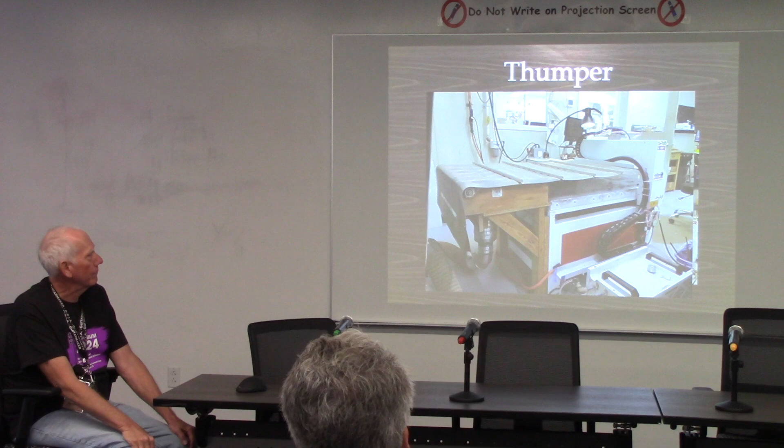So this is a machine that you can purchase. They're relatively inexpensive, and sometimes they actually work well. The Thumper is the name of the machine, and all our machines have names. But this one, we got an order when we first started business, and we had to fill it.

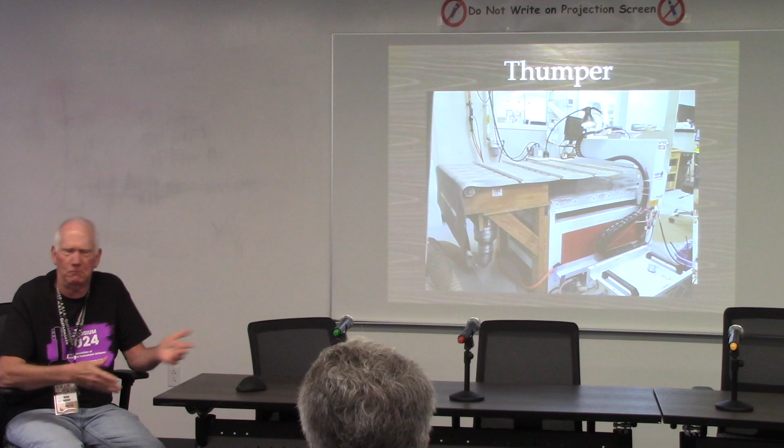But when I'd arrived, I called my friend Dan and said, Dan, I got it. He goes, well, cool, how is it? And I says, it's okay, it's working good. He says, good, I think I might get one now. I'm glad you tried it out for me.

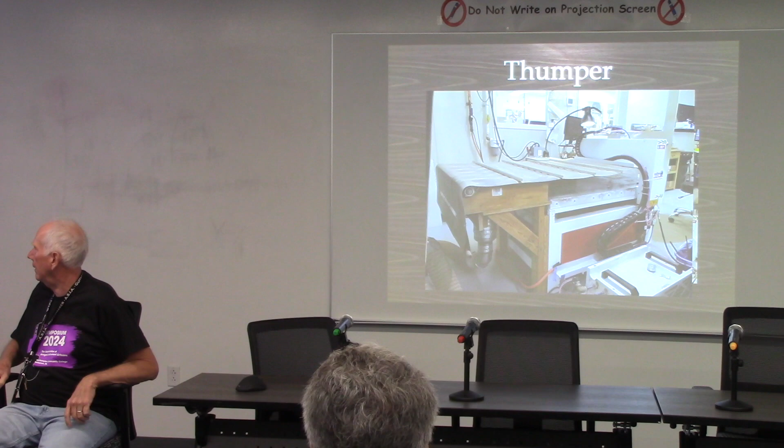But the topic of the dust, you can see that there's neoprene that's... oh geez, you know what I have? Do you have that folder? Yes. That's great. This will tell me what I'm talking about.

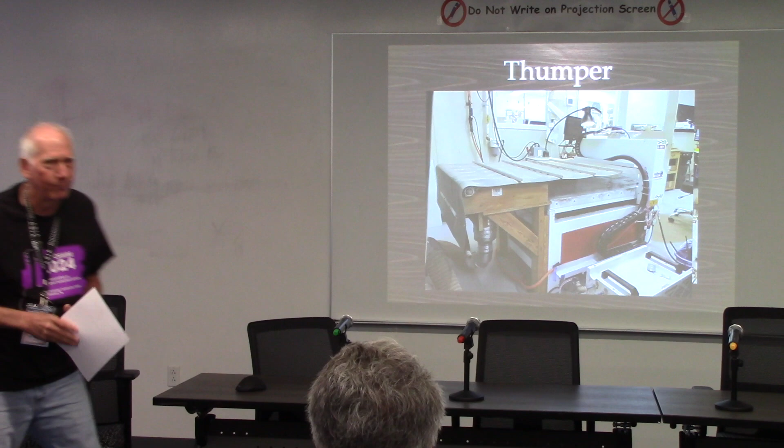So what does the machine actually do? Can you go to the next? There we go, now looking at the side of it. Oh I see, it's a moving gantry. Rather than talk about building machines, I was thinking most people here, if you're going to get into CNC, you're going to buy something, and this is what we did to modify this machine to try and contain the dust. So if there was not a cover on the back - you can see where the spindle is, there's some nozzles that we use air to blast the tool to keep the tool cool and dust away. That dust would be flying backwards or going everywhere and getting places you really don't want it to be. And health-wise, it's not so good to breathe dust, and nobody really wants to wear masks all day long.

So what I did was I took some plexiglass and bolted it on the side. I cut it in a way that would go underneath the gantry, and put it on both sides. And then I got this neoprene, which I have some specs on it if you have any interest in that.

But it flopped in the middle, and it wasn't working. I even put a weight on the back to try and cause it to be tight, but it still kind of bowed down in the middle.

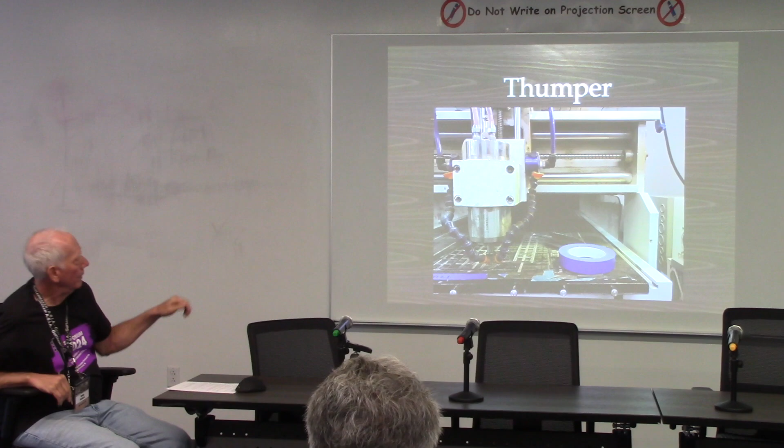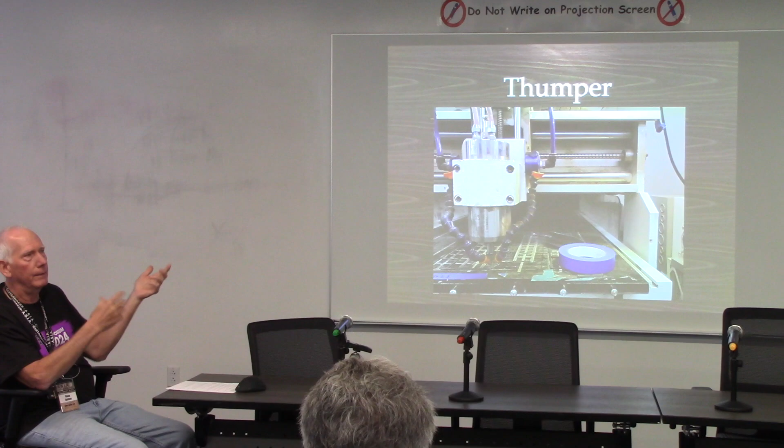So looking directly down into the chamber, that was the effect that I was looking for, was to try and contain this dust. And on the other side is the dust collector. So the idea was to create a negative pressure atmosphere that would want to draw things into the chamber.

And it's worked pretty well, and you can see it's pretty MacGyvered, using plywood and nails and screws, and I kind of built it in an afternoon because it needed to happen, and I did use whatever was available. The rollers and the bearings and things I got from Grainger, and just kind of MacGyvered it together, and it worked, so I didn't have to do any more.

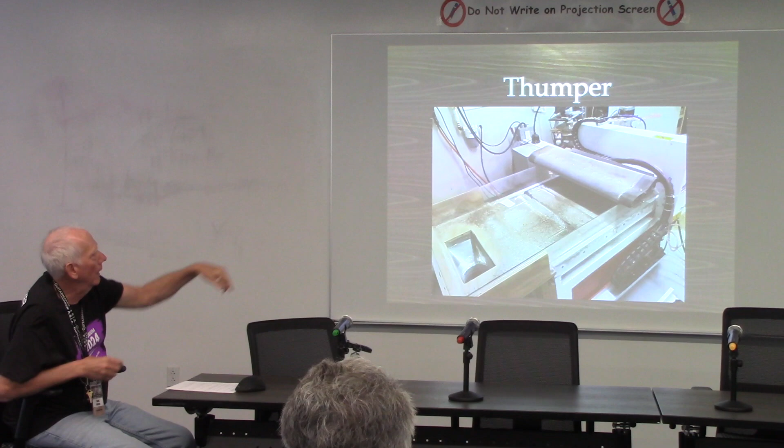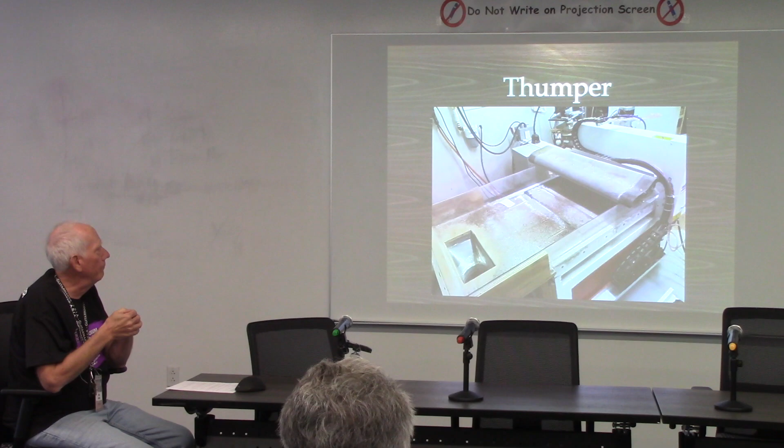And so you can see the screws on the underside, screws and washers that I did tap the holes into the U-channel, and just use an awl to push through the neoprene, and that's been working now for 12 years. This is the specs on the neoprene.

So what I found was I had used HVAC fittings. And I thought that was going to be perfect. It was going to work great. And it did, way better than what we had before, which was nothing.

And then what I found happening, that as we blew air into the dust chamber, it would kind of come back out, undesirable. And the dust was accumulating all around that opening. And I thought, why isn't it just falling in there? Because it's got the suction coming in. Why isn't it just falling in?

Well, it just wasn't. So on other machines, which we'll see later on, I came up with the hopper idea. And I looked everywhere. There's all kinds of hoppers, but there were none that I needed.

So I thought, well, let me just get some masonite that has that smooth surface on the outside, on one side. And I got in my CAD system and drew this thing up because I didn't know what the pieces would look like or the angles that were needed, and because I also had to fit it into certain areas.

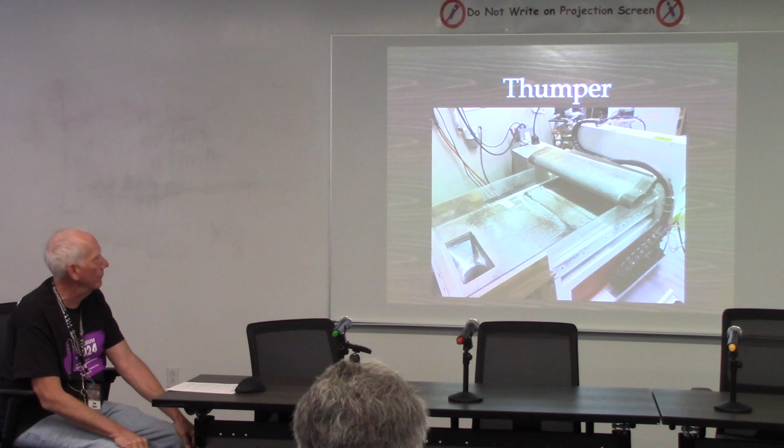Just one question. What size is that machine, the last one, so I can kind of get how big that pipe is? I'm trying to scale everything, but I don't know if it's a 4x8 or a 3x5 or whatever. How big is the table?

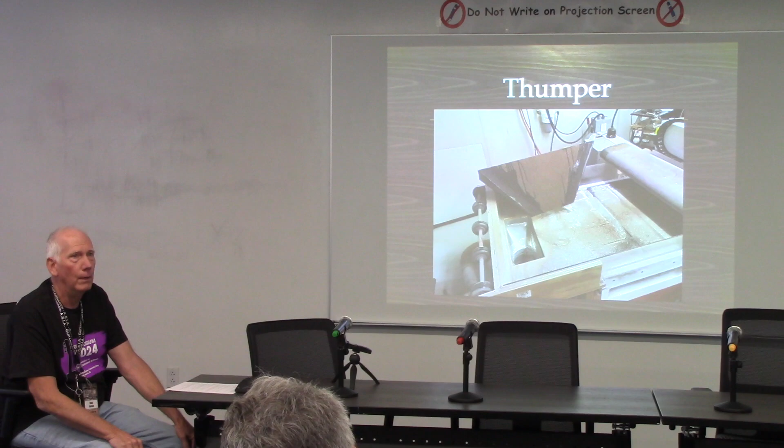How big is Thumper? Thumper is a 2x3, 2 foot by 3 foot. Okay, that pipe is not as gigantic as I thought. Thank you. Appreciate it.

T2 is the second Thumper. It didn't thump to begin with, but it's a similar design, and so instead of Thumper 2, we just call it T2. T2, when it came in, it was a different machine than T1. T1 was okay. T2 was a piece of crap.

It was terrible. So you can see the gray table underneath. I had to do away with the table that it came with because it couldn't cut a straight line. So I ended up getting a precision ground surface table, which this company in Chicago, they make machine bases, and I think it might have been $1,000.

But it's precision ground within 2 thousandths on the top, and I used that as the new base for the machine. I took the Thomson rails that were on the old machine, on the old base, transferred everything over. I had to change a little bit on the gantry to incorporate the table, but it ended up that after putting that new machine base on there, it's incredibly accurate. It's my coworkers, they enjoy using it.

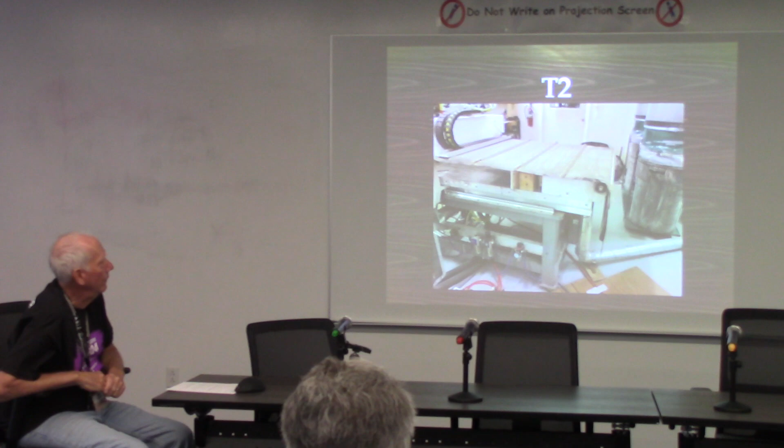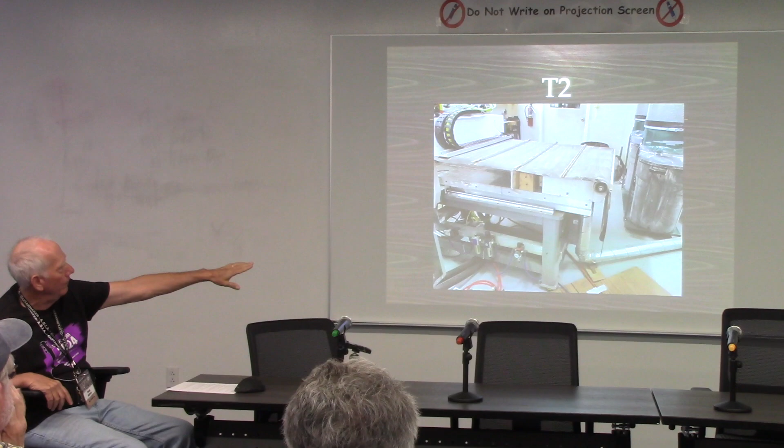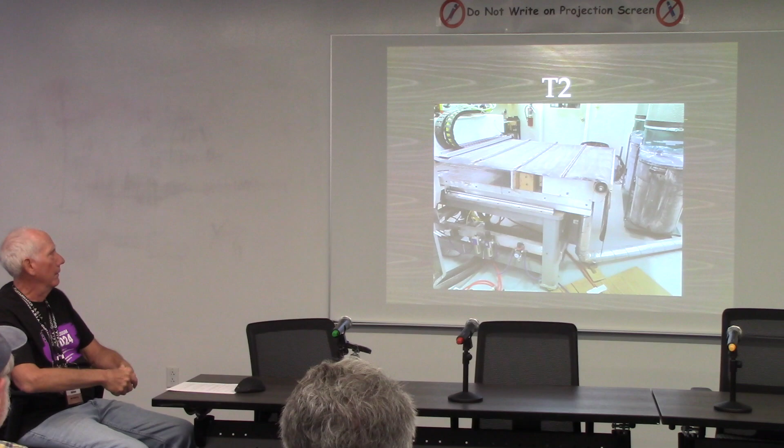I had some 2x4s and some... What are the bearings and pulleys for? Just so it rolls up and roll? Oh, it's got to be able to move when the machine moves. Yes, when the machine moves, and you can see at the bottom there. Basically I think on this one it's just a steel rod that I took the end and folded up, and it does what it's supposed to do.

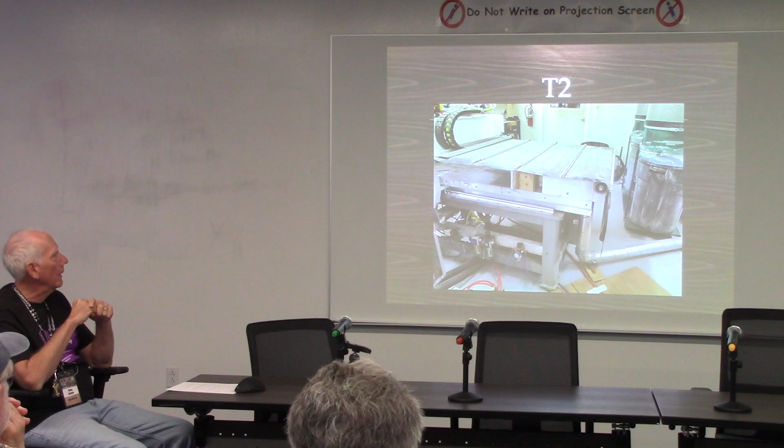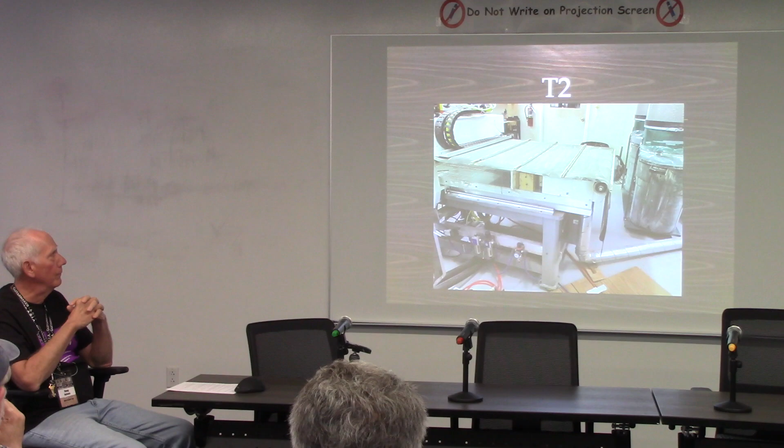The plexiglass I just cut on a table saw to the sizes I needed, then took a file on the edges to get any sharp edge off, because I didn't want the plexiglass to have a wearing problem. As long as the surface is smooth, the neoprene just keeps on going - I haven't replaced any of it at all. And you can see this is kind of like a modified hopper.

Do you have any dust collection right at the spindle? No, we just have the air nozzles. I thought about it, but since we change our tools quite frequently and also clean the collet very frequently, all I could think of was how much time that was going to take to move the collar, and it just wasn't something I wanted to do.

So why do you clean the collets a lot? Just so they don't get crap in them and wear out more quickly, or? Yes. These are ER11 or ER8 collets, and the dust gets in there - shell dust, wood dust. And the more dust that gets in, the more the tool runs out.

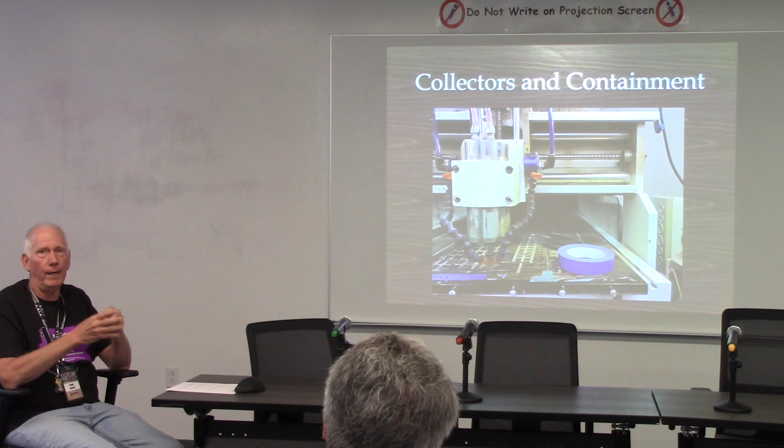So if you find that your tool is breaking a lot, you might think about cleaning the collet, because those little tools don't like that - they let you know there's runout. But pretty much every time we change a tool, we'll at least take the nut off and give it a gentle air blast to get any debris off. If we have to hold real tight tolerances, I'll do that whole WD-40 cleaning process. And believe it or not, when you measure the part, you see the difference.

How many operating hours are you running your collets and nuts before swapping them out? Do you track that? It's in years. Okay, it's in years.

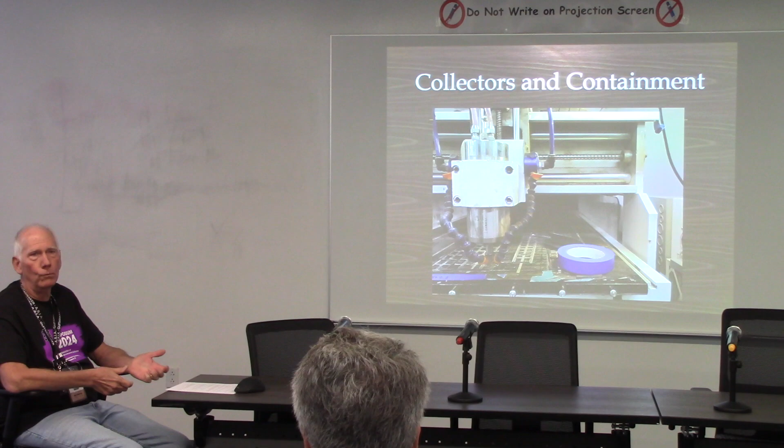The spindles we use are water cooled, and typically we bought them from Alibaba. I was buying 20 at a time because we have multiple head machines, thinking, well, it's Chinese, it's not going to last long, and it's water cooled so it's going to rust. In the first couple of years we had tanks of water, tubs, and little pumps like you'd use in pools or ponds. The water got really nasty, and it plugged up the spindles, so I just ran them till they cracked. The price of a spindle was only about $150, so I was thinking if it goes a year, great, it's a throwaway.

So things evolved, and we've gotten to a point now where we have laser chillers - this is one - and I've gotten antifreeze from West Marine that has rust inhibitors in it. These chillers are totally enclosed, no dust gets in, and using the antifreeze instead of water means it doesn't grow the contaminants that water likes to - there was stuff floating in there, it was nasty. The tank's still over in the next room, and I'm the guy who got stuck cleaning it.

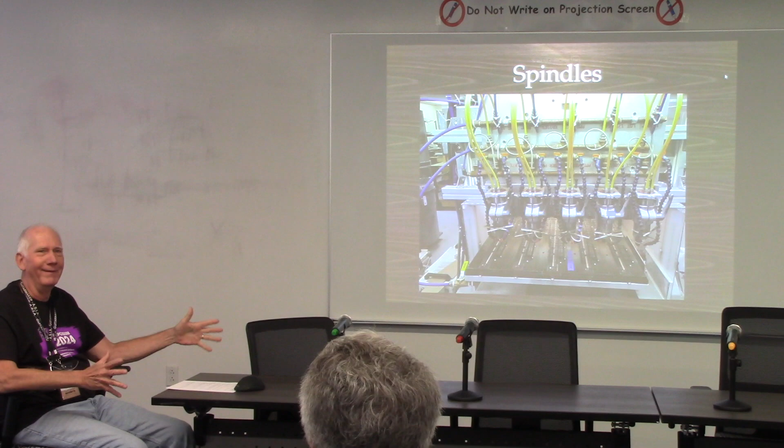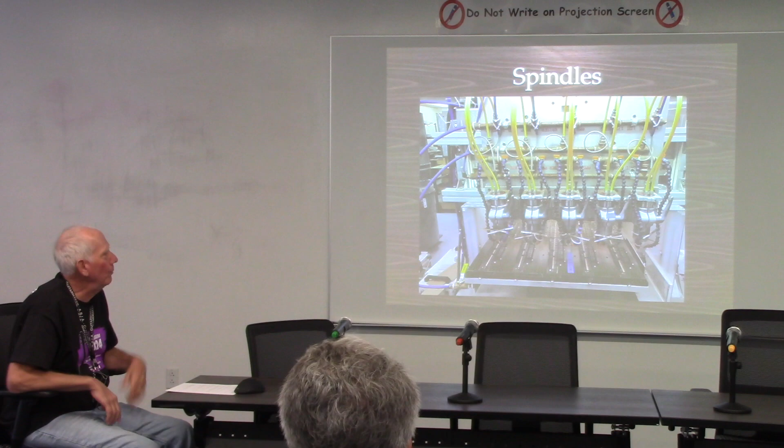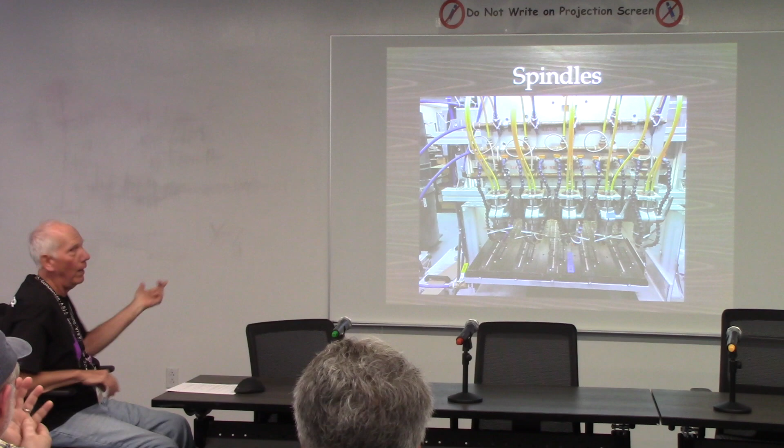But these are from China. What voltage are they? You can buy the spindles by themselves, or you can buy them as a set with an inverter. And so the spindles typically are three-phase, but the inverter is single phase, which is like your house voltage. So you can take 220, which would be a house voltage, like for your dryer or your stove, and it converts it to the voltage. And of course, in the inverter, there's lots of parameters that you have to mess with to get things right. But that's how it's set up.

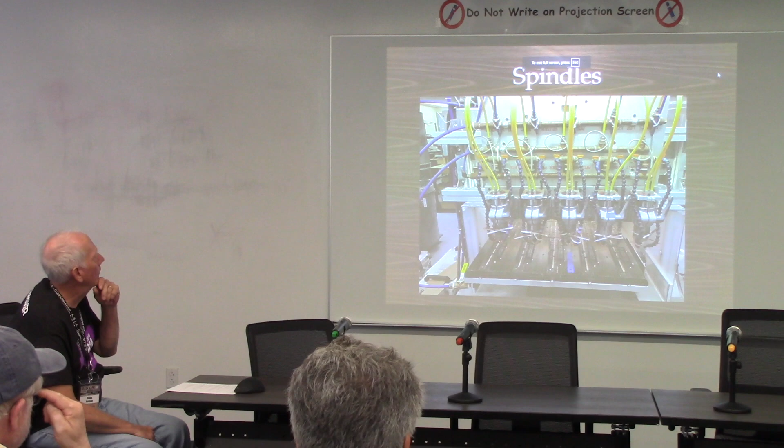But can you go back to the five-headed machine? Oh no, that's going forward. Here we go. What I did was the inverters are on the back side. I made a big box out of aluminum, and in there I put all the inverters, all the power supplies, all the fuses, all that stuff is in this box in the back.

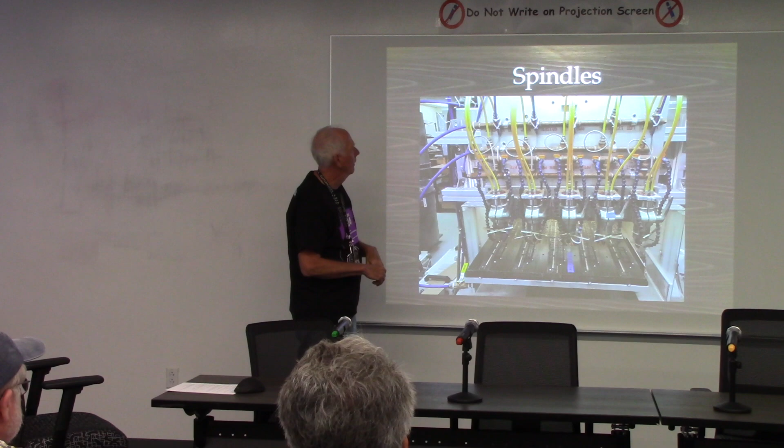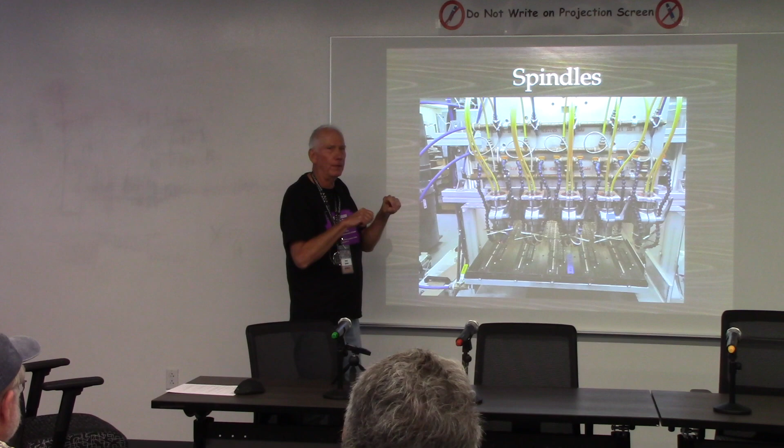I needed to have a wire thing to hold the wires, like a wire track. And I thought, well, I don't want to have all these bulky things. So what I found was tubing, like air tubing. That was the idea, it was big enough so that I could put the wire all the way through it. And I secured it on one end inside the box and just cut a hole in the metal and had it as I go up. So they're kind of looped around, and you can see I just kind of used wire ties. Again, this is all MacGyvering now.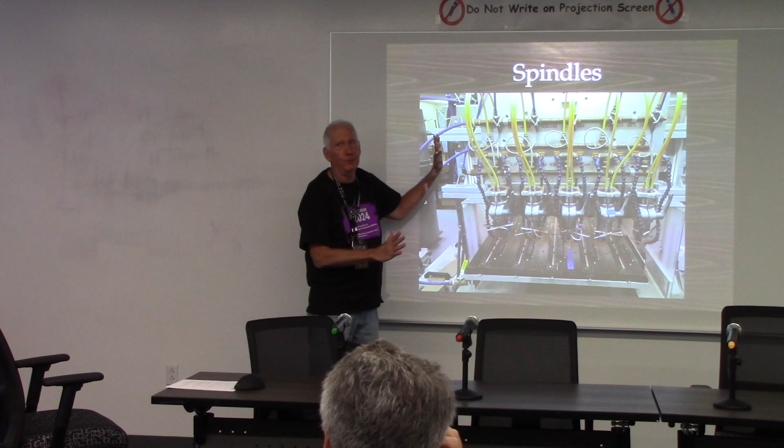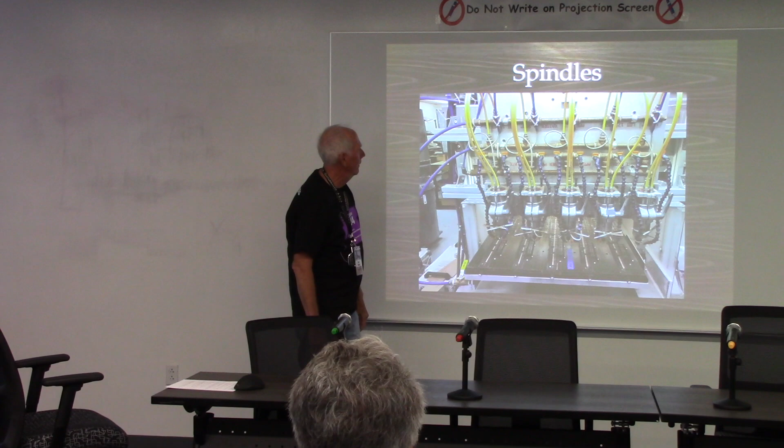And once it works, you don't have to touch it again. Or even make it better. So you can see coming out of that tube is the wire that then goes into the motor. I did that 12 years ago, and it's been working ever since, so I didn't have to do anything to it. Color coding, you can do your own. I happen to have yellow 8mm tubing that was required for this, so that's why it ended up being yellow.

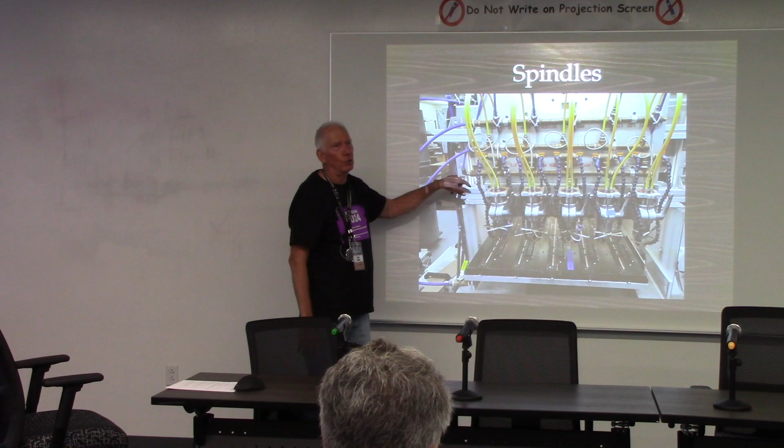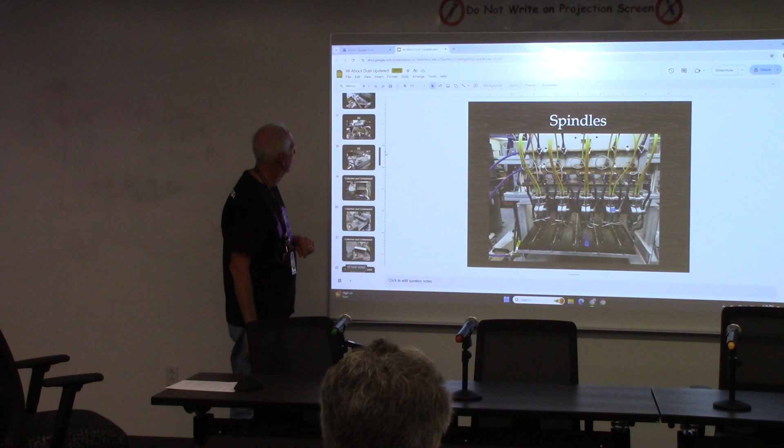This stuff doesn't last a long time. It's lasted 12 years, and it gets brittle and breaks, and the antifreeze shoots out all over the place. So currently we have clear 8mm tubing, and that's on the first one. I think Thumper had it. Yeah, Thumper's got it. So these are still functioning, so they're still yellow. But yeah, Thumper's got it right there. So you can kind of see that it's clear, and you can see the antifreeze.

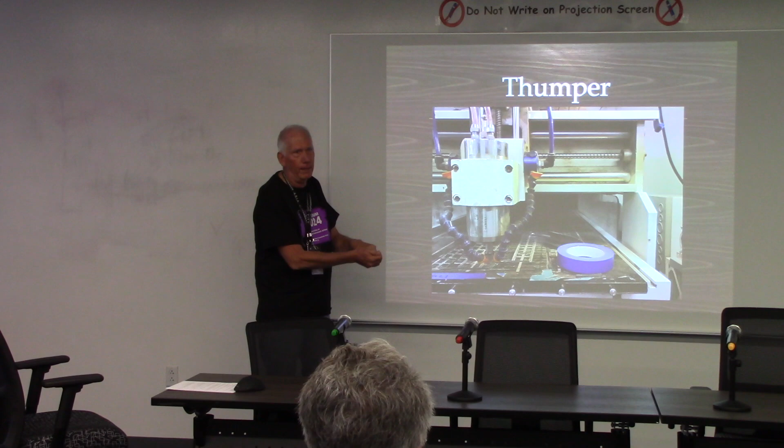Now our coworkers, I said this is nice that it's clear now because sometimes debris does get in, and you need to disconnect the hoses and either blast it out. I found that I've got a solid copper wire that can actually get down in, and you kind of wiggle it around and give it an air blast to clear it. But I asked them to keep an eye on it, if you start seeing bubbles, then we know that we need to clean it out.

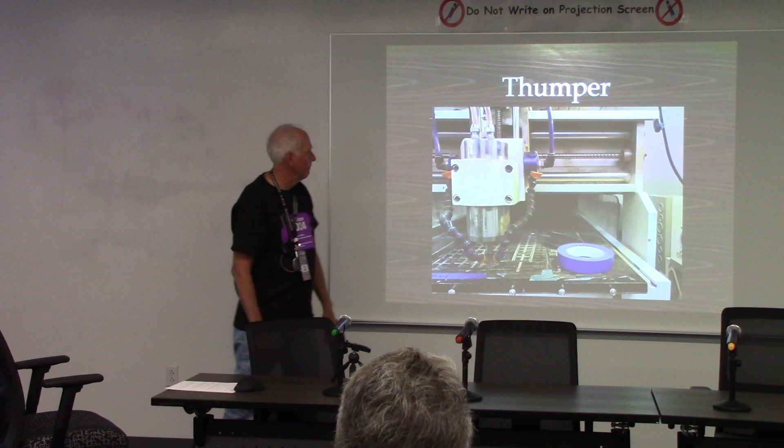So go back to these dust collectors, let's go back. We're kind of jumping around on this. But okay, we can go to collectors and containment.

So we got the Grizzly dust collectors because they were inexpensive, and they have worked well for us. Those are 220 volt or 230 volt single phase. I haven't integrated them into the machine where you turn it on with a button up by the station, because once we turn them on, they pretty much stay on. But one thing that we did was we put trash cans underneath so that the liners, when you have a blowout, it's nasty.

What we found with the trash cans is when there's a blowout, it kind of seals itself against the wall of the can. It lets you know there's a hole in the bag because it does come up, but it doesn't infect the entire shop. That was a revolutionary idea that we came up with.

Do you have the top on the can with a... actually, you can buy them without it. I'm just looking, I see something on top of the trash can. I was wondering if you took a top and cut it, maybe it's just plastic, like the foam, is that foam? Oh, this? Yeah, that's the collection bag.

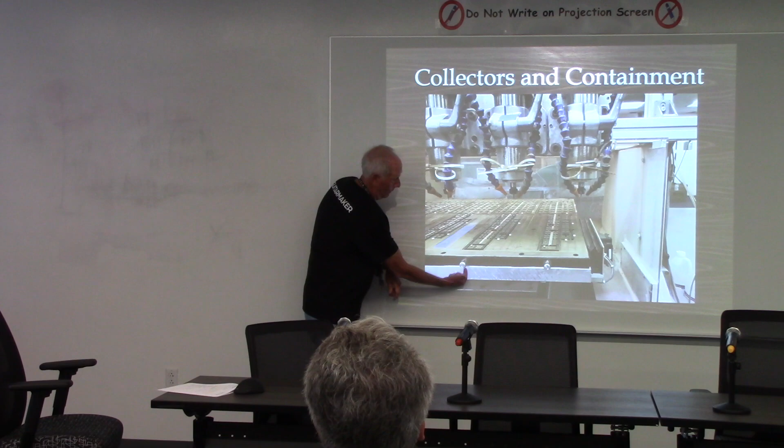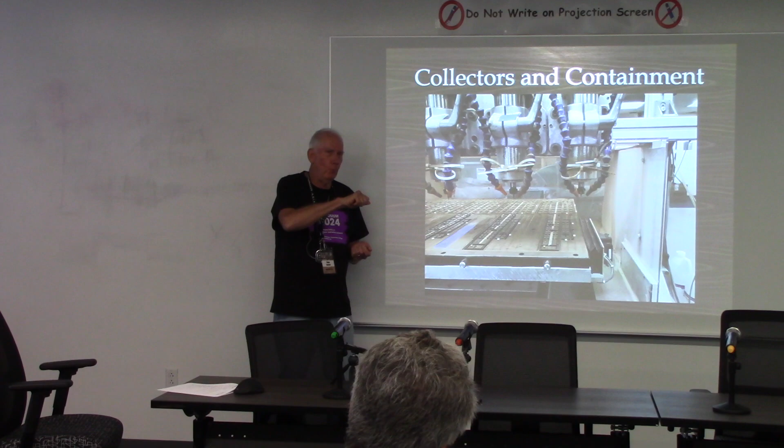What I did was cut a channel this way with a 1/2-inch end mill and milled out the aluminum, putting a channel inside here about this far back. Then I tapped a hole on one end for a pipe fitting, and that's where the vacuum attaches to. Then on the top of this, which would be the Trespa, I drilled a hole this way. This is a tuning knob, but it's actually a valve. So I drilled a hole this way, and another hole this way, so that it's on the end of a tube that fits in there. I can turn it one way and the suction draws through the tube, and turn it the other way and it's blocked.

So then what I had to do was get the vacuum out here. I ended up milling a slot with the machine and put a piece of tubing - you can get it from Grainger or McMaster-Carr - and connected it to the end of this little tube this way. So when the tube rotated and the suction came through, it would suck through here. But then I had to cover up that tube, so I ended up using Bondo. It smelled like a car shop for a day or two. I just filled it up and put it in there - it cures really quick, like maybe 10 minutes.

Then it came time to surface the table, so I ended up using router bits that had a 1/4 inch shank and a 3/4 inch cutter. They're kind of dangerous, I think, but they worked. You can see the width of the cutter - it surfaced the whole table flat, so now everything's flat in relationship to the spindles.

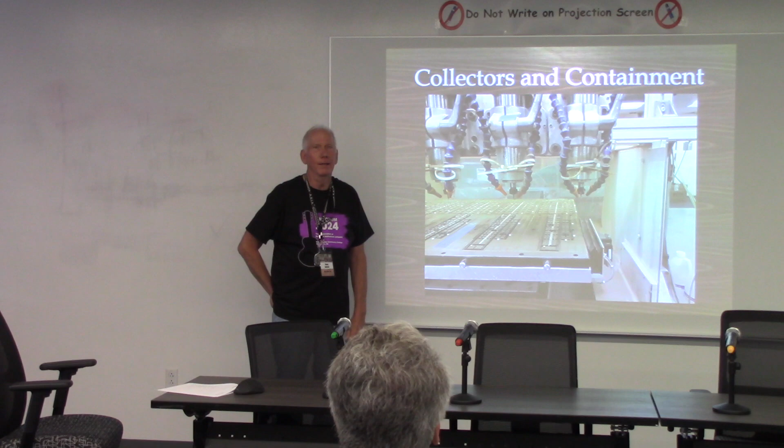Chris, what size vacuum pump are we running? It's really kind of cool, I think it's new - I think it cost about $2,500 with a motor, and we mounted it...

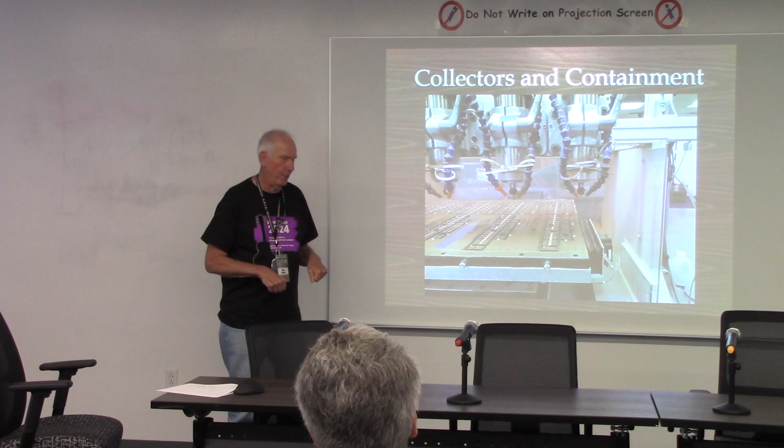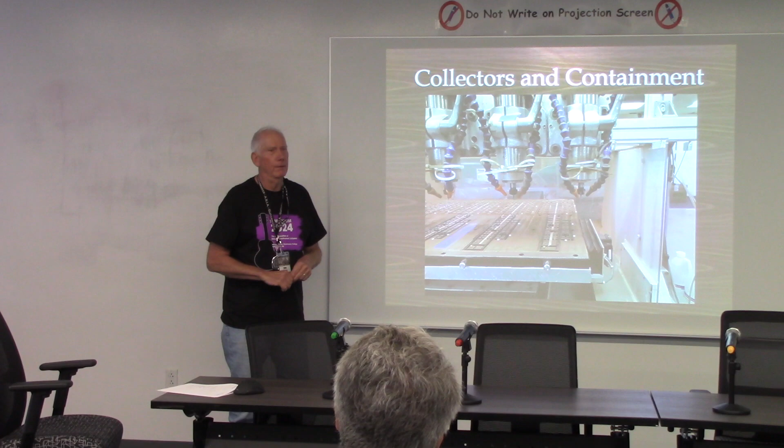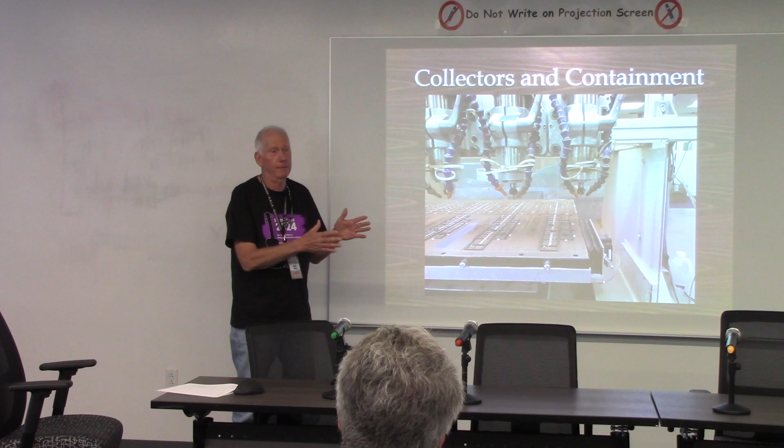You can get these air compressors that have their own tank on little wheels. Early on, we burned through quite a few air compressors, so they're sitting there doing nothing. I unbolt the air compressor, take it off the tank, and get rid of it. Now I have the tank, so I take the vacuum pump and put it on top of that tank, and now it's converted from air pressure to vacuum pressure. It does a great job.

But the one we have, I don't have the name of it, but it's oilless - it's used in hospitals. It has these carbon vanes inside that rotate, and we run it every day, 8-10 hours a day, every day of the week. They last probably about 3 or 4 years before the carbon vanes self-destruct, and then there are kits we can rebuild it with pretty good. But it's dry, there's no oil in it, and it works really quite well.

The other thing that's helped the life of the vacuum pump is we got vacuum filters from a company in Massachusetts - again, I think it has to do with the medical field. They're just these big canisters with a filter in them, and we should clean them more often, but I really only clean them about once every 3 or 4 years. The canister unscrews, you take the filter out, go to another dust collector, blow all the dust off of it, reassemble it, and put it back together. But that has saved our vacuum pump dramatically.

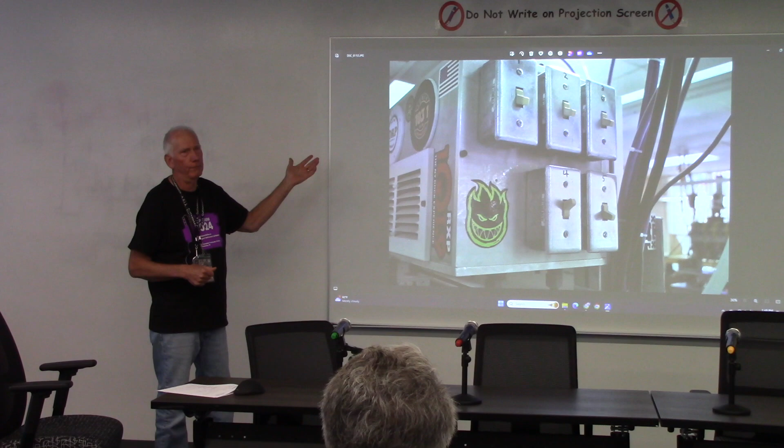On the 5-headed or multi-headed machines, I got light switches that can handle 220 volts. Each inverter has its own light switch. So when we're running 5 spindles, we have 5 switches on, and when we're running 1 spindle, we have one switch on, because we just have one command, an M3 command, to turn on the spindles, and that's a relay that sends a signal to the inverters. So if the inverters are on and you tell the machine to turn on, they're all going to turn on, which can be dangerous if you're only running 1 spindle. So that was the idea behind the light switches. Is that what you're talking about?

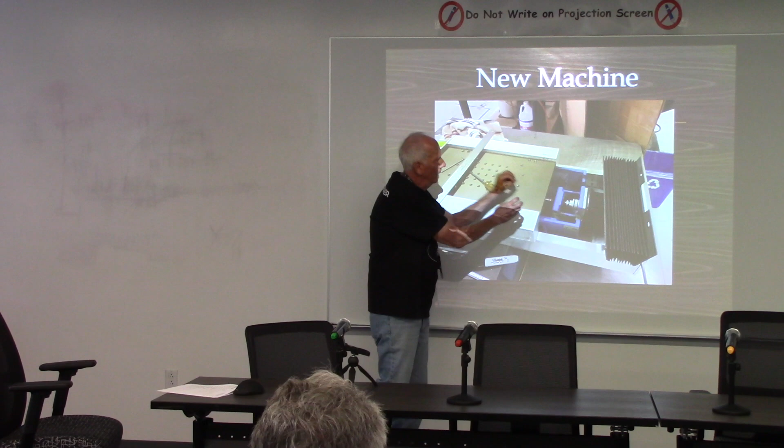This is a machine I have in process now, and I'm spending so much time trying to figure out how to keep dust out of it. In this picture I'm working on creating chambers inside. If we go to the next one, it shows it a little better - there's an area with a bottom underneath, some sides, and bellows on top, creating a chamber to keep dust out.

What I've done on other machines like this, once this chamber is created, is different - I'm not trying to keep dust in, I'm trying to keep dust out, whereas the other chamber was trying to keep dust in. Once the chamber is created, I put dry compressed air inside, basically just a hose in there with maybe 5 or 10 PSI, so I need a regulator for it. It puts air pressure inside the chamber, inside the table or machine, and that makes it less likely for dust to get in, because there's always air coming out.

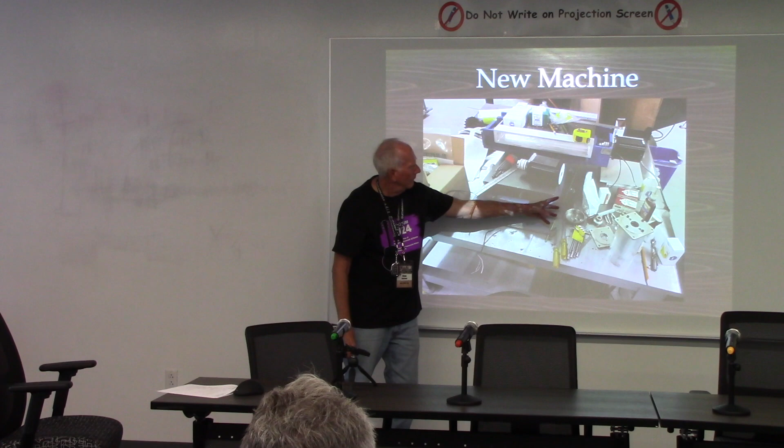You can see it pretty good here. Now if we go to the next one, and another one. So now I've had to take this apart, because I'm working on the chamber for this one here - you can see there's a little MacGyvering going on. If we go to the next one, yeah, you've got all kinds of tools. If we go to the next one, this is what it's going to look like.

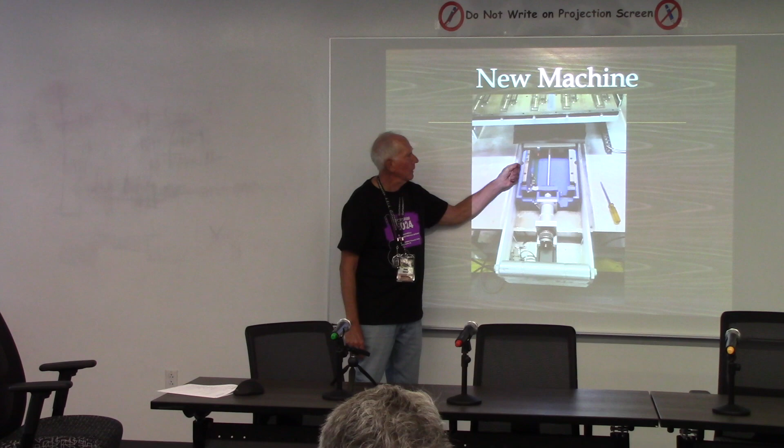We have an enclosure that the neoprene can ride on, with some rollers here. This machine has dust - when we're running, there's dust everywhere, all over it. It's been in operation for at least 6 years, and this is what it looks like inside. So that air pressure really does work.

Almost 2 o'clock. Thank you, Chris, I'm sorry. Where do you source most of your end mills?

Thanks for the tip on cleaning collets. Yeah, it's because people ask me why is my bit breaking all the time. I say, have you ever cleaned your collet?

Can I add one point there? For all you guys getting into CNC - because I did this, I'm so used to the machinist handling R8s - make sure you snap your collet into your collet nut, because if you don't, you're going to incorporate uncontrolled runout. Do you have a question? Okay.